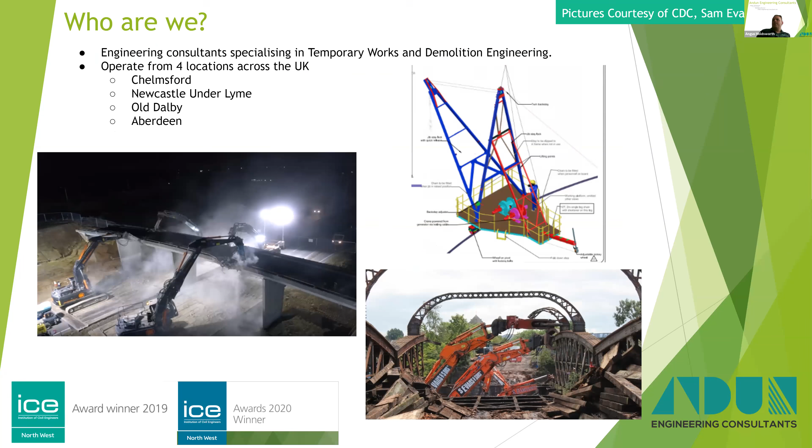Today's presentation is on cut and carve demolition. Some of you may be fully aware what cut and carve is, but for those who aren't, in general terms what it means is you're taking a structure and modifying it. So you're not completely demolishing it, you're generally looking to keep it.

This is a good example of a job in West London, Gramophone Works, where the red shows holes that have been cut in the slab. There's lots of risers and bits and pieces, and all the facade has been taken down.

Interestingly, they wanted us to break back. This is the cut line here. So the cut line was here, but we then had to break back all of this to expose the rebar so they could tie the new slabs in. Sometimes they do it like that, sometimes they don't, but in this case that's what they wanted. That's a good example of cut and carve.

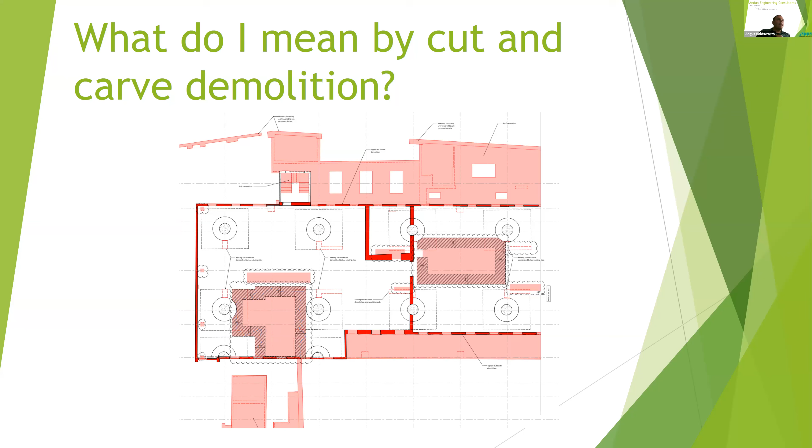Another good example was the works we did at Centrepoint House, or Centrepoint Tower in London. Again, you can see on the left-hand side everything in red had to be demolished and taken out, and on the right-hand side is what went back in. That's a good example of a cut and carve scheme.

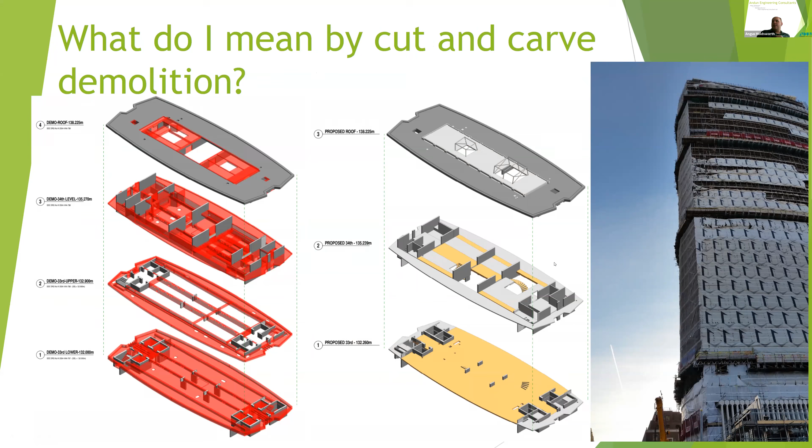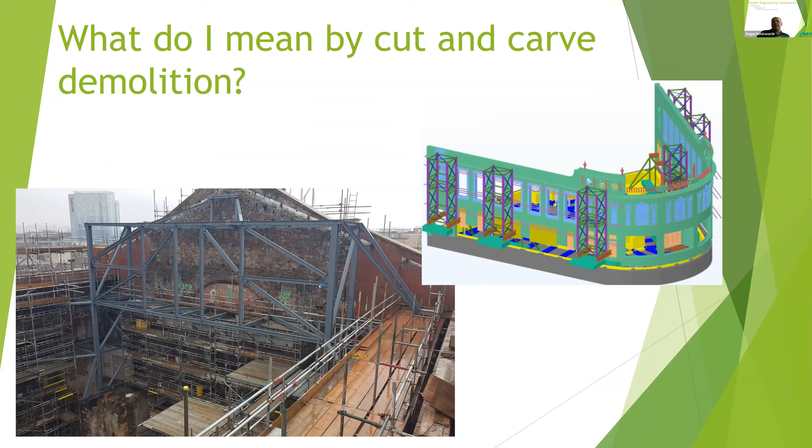Facade retention can be classed as cut and carve, I suppose, because you are looking to keep a good proportion of structure. It's not typically what I would mean by cut and carve, but it's kind of along the same lines - you're looking to keep a large part of the existing structure.

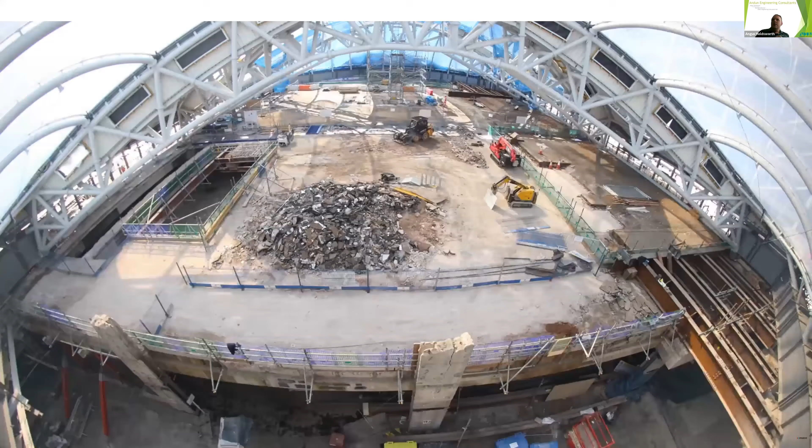This is a very good example - Birmingham New Street. This is the very top of the structure, the top level. Quite an old one, but also quite a good video of cut and carve in action. You can see they put the atrium over the top, and then we're taking out what is now the nice big light concourse level at New Street Station.

If you remember how the station used to be, it's quite a different beast now. But this is a good example of cut and carve where we're taking out significant parts of the structure whilst keeping the rest of the structure and keeping the building operational at the same time.

In this case, though, we were actually able to run some quite large plant because that building was built like the proverbial brick house. I think it was actually about a 20-ton machine. It was their custom-made - what was it called - the Mega Muncher. It was a combination of bits from JCB and a special dipper arm and a large attachment.

There you go. So that's a good example of a cut and carve scheme.

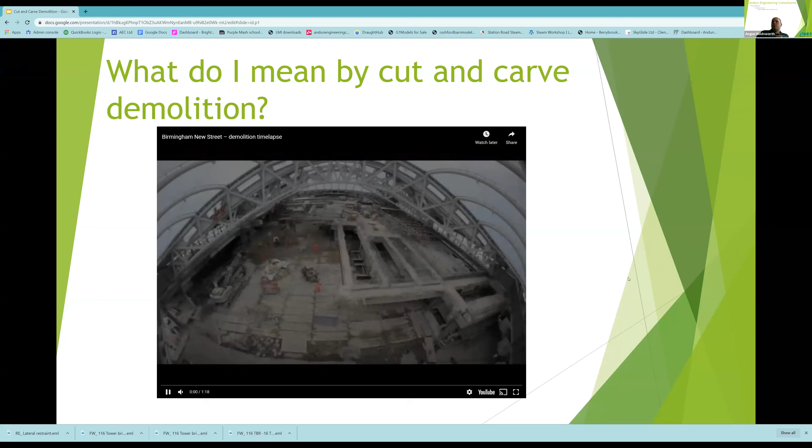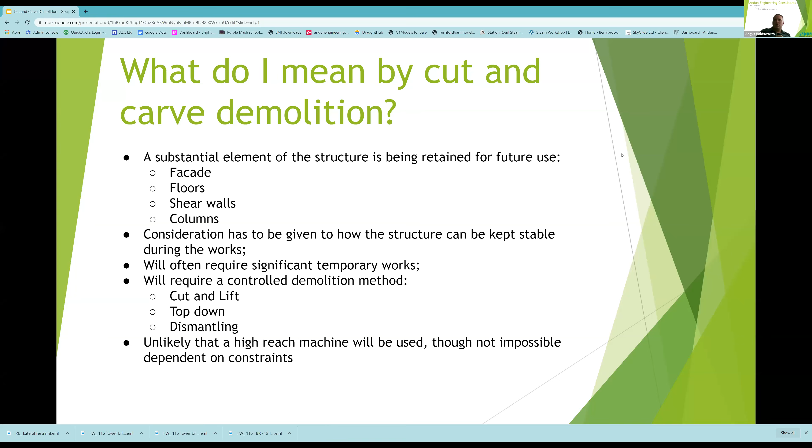I don't want to play that again. Why has that gone like that? Sorry, it's just gone a bit weird, give me 2 seconds, I'm just going to stop sharing and then reshare my screen because it looks a bit weird to me. Where's it gone? Why can you never find the button you want? There we go, right. Hang on, still not looking right. There we go, right, try again. There we go, that's back to how I wanted it.

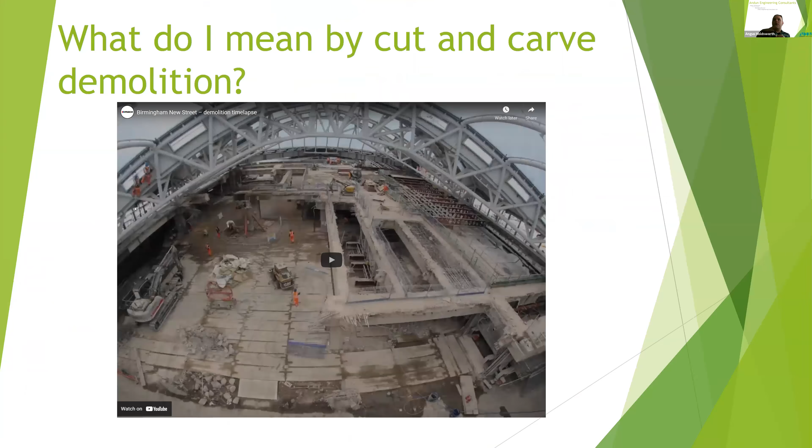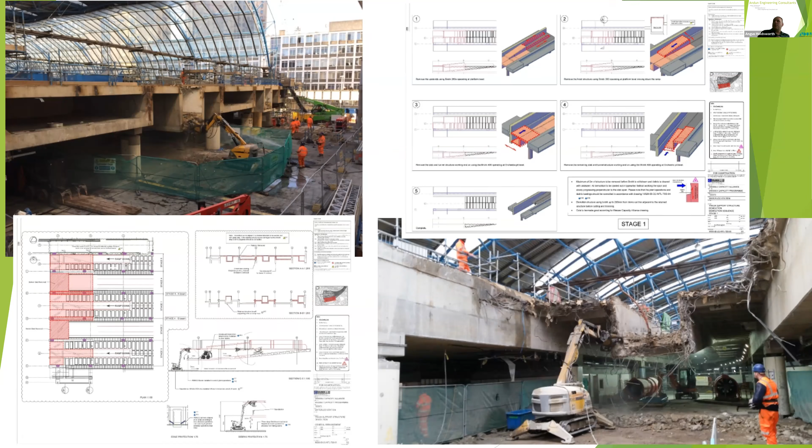So just as a recap, a substantial element of the structure is being retained for future use - that's when it becomes cut and carve. You have to consider how you're going to keep the structure stable.

Just want to check something, sorry. Yeah, fine, sorry, I just wanted to make sure you could see it properly. That was all - how we're going to keep things stable.

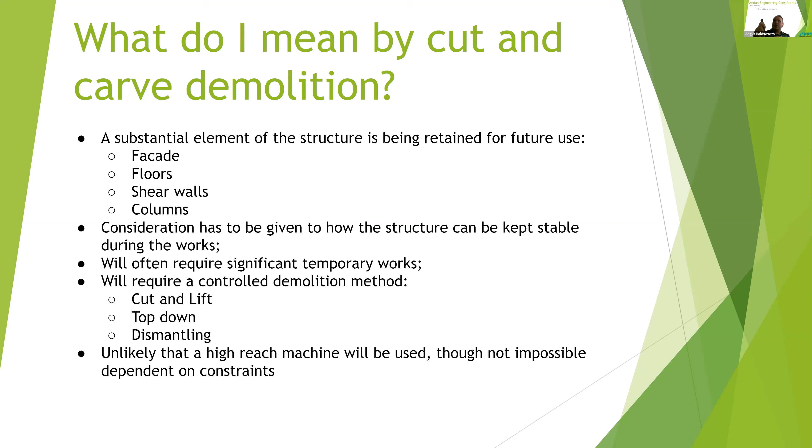We'll often require significant temporary works, and it's normally going to require a controlled demolition method. So you're going to be looking at cut and lift, top-down demolition or dismantling of the structure. Unlikely you'll get to use a high-reach machine or a large excavator, but it's possible - it depends completely on the structure and how much of it you're taking out. Generally, though, we're looking for a controlled demolition methodology. Now, the reason we end up doing it so often is planning constraints.

So it's a lot easier to get a scheme through if you're not demolishing the whole structure and you're planning on keeping what's already there. It's looked on a bit more favourably by developers, by the planning committees. If the structure has been assessed and they think there's some redundancy in it, this is getting quite common now in London.

Is they'll look to see if they can put another floor on top of the existing building. This will typically be in CLT, cross-laminated timber, or a lightweight steel structure, and you can put 1, 2, maybe 3 extra floors on top of a structure, and then you might be messing around with the core, changing the lift shaft arrangement, changing stairs, that sort of thing.

If you're changing the use of the structure, so potentially going forward, if people don't go back to the office, then you'll be potentially looking at changing office buildings into residential, and then there'll be a lot of messing around with cut and carve of buildings to change the use, I would expect.

If your facade or the structure is of historical importance, then you're probably not going to get away with demolishing it, therefore you're going to have to keep it.

And the other one that's becoming increasingly more important is environmental considerations. So people are certainly being considered far more detail than it was even going back a year or two ago. How your carbon footprint is, how it looks for the structure. Obviously, if you can keep a part of the structure and build upon that, it's going to cost you a lot less, not just in money, but in carbon, than if you demolish it all and start again from scratch.

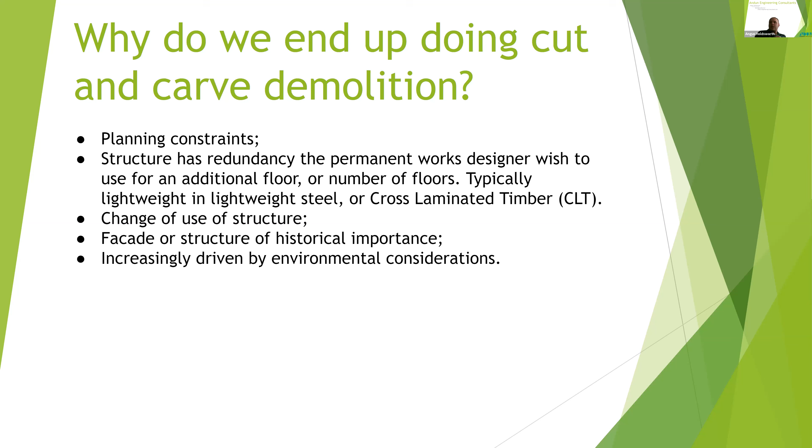So it's something I think that's going to increase as we go forward, the amount of cut and carve work as opposed to full demolition.

So there's a few things that I've identified that make cut and carve different to normal demolition works. And that is the need to consider serviceability. Normally when we're demolishing a structure, we're not concerned with serviceability a great deal. We want to make sure the structure is not going to fail when we're doing the demolition, and that's pretty much it.

A thing called load history needs to be considered, which I'll go through in a bit more detail shortly. Deflection becomes far more important, and deflection here, I'm thinking if you're propping large parts of the structure, the settlement or the movement of those props is quite an important issue, and knowing how to get around it and what to do about it. Stability is more likely to be an issue as well when you're doing cut and carve.

Quite often the core is what's removed from these structures because they want to put in a bigger lift or a faster lift, or they need to make the lift shaft taller. So you end up, one of the first things that goes is the core. So you've got to put in temporary stability to the structure. Whereas if you're doing the traditional demolition, you're more likely to be able to work towards a core or the stability systems in the existing structure and maintain stability in that way.

And then the other thing that becomes more important is how does the follow-on contractor complete the scheme? So traditional demo, you're going to leave the site either with basement backfilled or basement slab and first floor slabs or ground floor slabs still in. When it comes to cut and carve, you're going to do all the demolition. It's going to be handed over to the next contractor, or maybe you'll carry on with the works, but often another contractor comes in to then do the rebuild, and you've got there's that handover between how it's been left after the demolition and how the follow-on contractor is then going to work.

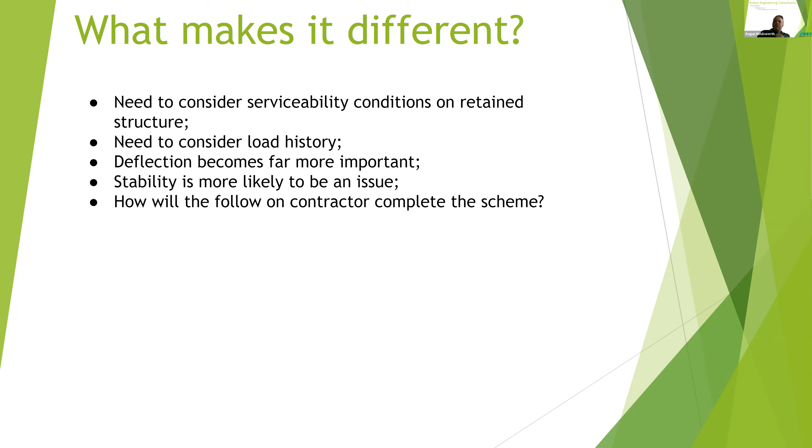So serviceability conditions. This is another job, or this is Gramophone Works again, where we were cutting some large holes in the structure throughout all the different floor plates. Not a very tall structure. I think it's 3 stories in the basement, and lots of holes being cut.

And we obviously had to consider serviceability conditions of the slabs during the demolition works for access by plant, men, materials, and propping to suit to make sure that the structure would remain stable throughout, and we're not going to cause any cracking.

And we're not talking here about visible cracking, we're talking about exceeding the serviceability capacity of the slabs, which leads to micro cracking, which long term can lead to rusting of the reinforcement, and can affect the lifespan of the structure.

So you have to think about making sure you're not exceeding serviceability, and considering how the change in removal of section of the slabs is going to affect the building. So for instance, here you can see the grey circles there are the columns.

If you cut these big chunks out of the structure, you're changing significantly how the slab works, and you've got to make sure you put the props in the right place to pick up those loads. It's not the same as back propping a structure for plant loadings - it's quite different because you're cutting and changing the load path within the structure.

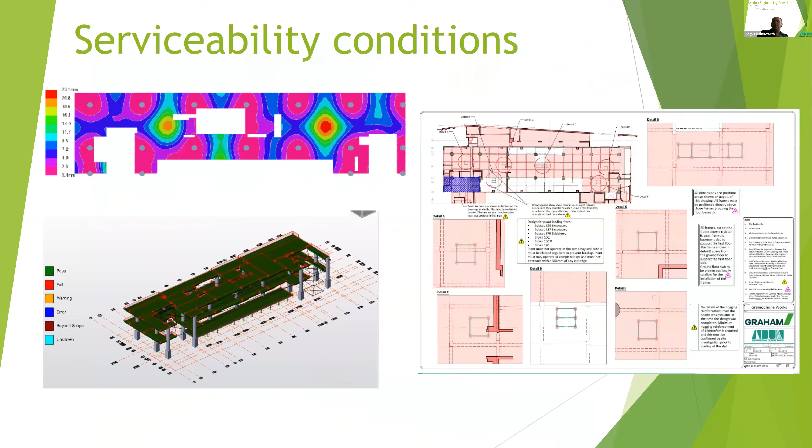And there it is in reality. I think they actually changed the cut lines from the drawings we had there, but you get the idea that we're taking sections out of the structure. You can see there they've broken back and left the rebar protruding out of the slab.

Obviously, with work like this, it's even more important that you know how the structure is going to behave and you have sufficient information regarding where the steel is, the grades of the steel - all of these things that we want anyway, but it becomes more important that you know how the structure is going to behave if you're trying to keep part of it. And it's equally important for the permanent works designer to know this, so they know that what they're doing is actually going to work.

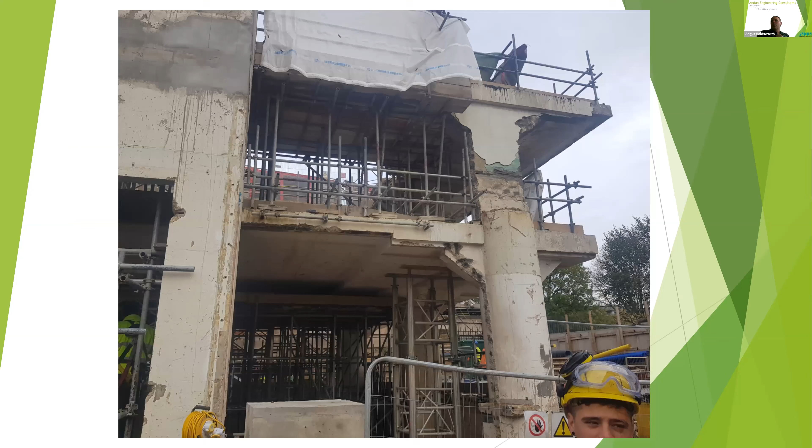Just an example, we can see quite a lot of the Titan propping in there.

Serviceability again becomes more important when you're looking at pre-stressed structures. So here, this is at New Street again, but it was quite a good example that sprung to mind. We had to run a lorry in over these beams, which were precast spanning grid line to grid line. Now, they had the ULS capacity to deal with the loadings, but they would have been pushed past their SLS capacities, which would have affected the longevity of the beams.

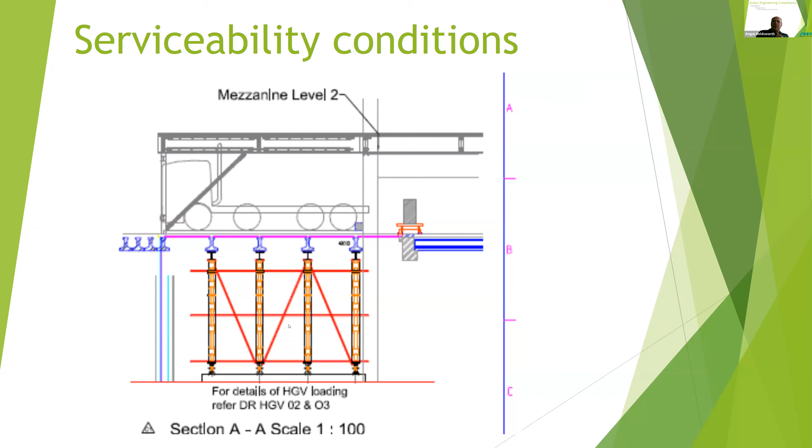Therefore, we had to prop it. Again, that's not something you would do if that was all being demolished and it had structural capacity for the load - you wouldn't worry about it. But because we're keeping it, it becomes something to be concerned about. And there's just a picture of it in use. You obviously can't see the propping or the slab underneath, but that is the same location as you can see there with the beams coming out.

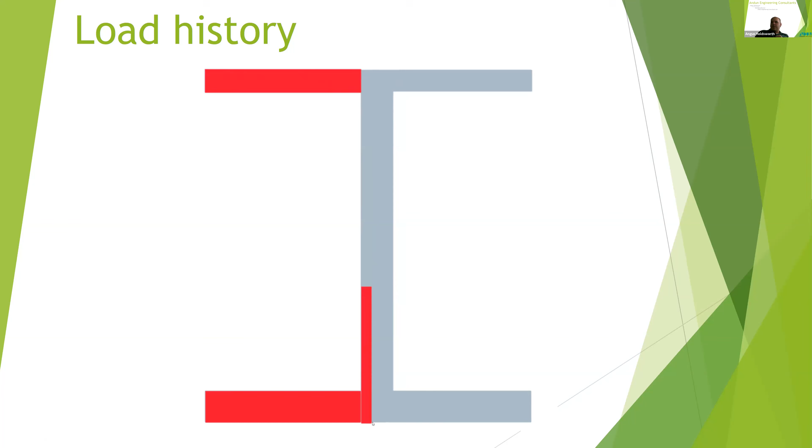Load history - this is a topic that we've come across many, many times with schemes that come in. People don't seem to grasp this concept. So if this is a section through a building, you've got a concrete column, floor slabs, and the demolition drawings say, right, you're taking that slab out and we want you to take out part of that column and that slab there, and then you're going to tie into that column.

What they seem to miss is that if you break that out, all the dead load in the structure is now going through here - it has to, it's the only load path that's left. When you come along and you tie in your bit of concrete here, this green section in the column is not going to be carrying any dead load at all. It can't, because the dead load is already being carried through the reduced column section here.

And that becomes very important when you start considering, is this tied in? When they start assessing it in the permanent case and say, oh well, we've got a full column back again, and then they spread the dead load and the live load through that full cross section - you can't. It's only this part here that will carry the dead load. This part here can only carry any live load that's applied up here. And we see it quite a lot.

The only thing you can do is jack the structure, then cast that, then release it. That way you can put the dead load back through the whole cross section. Similarly, with steel beams or steel columns, if you want to strengthen a steel column for dead and live load, you've got no choice but to jack the structure - you've got to jack it to take the dead load off the column. You can then strengthen it. Then when you release the jacking, that dead load will go through that full structure.

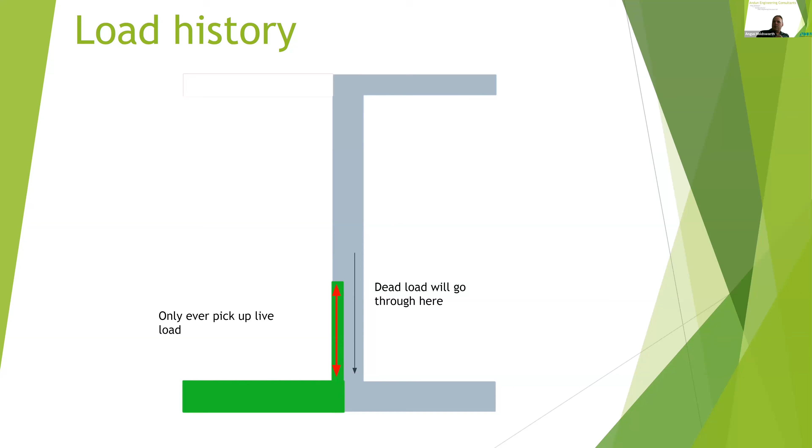If you just go up to a column that's already carrying the full weight of the structure, then you put your strengthening on the side of it, that strengthening will only ever pick up any live load that's applied to it. It can't possibly pick up the dead load that's in the structure. This idea that it can is nonsense, and we see it quite often with cut and carve and strengthening schemes.

Deflection - if you're keeping part of the structure, maybe 7, 8, 9 floors, and propping all of those back to ground level, the deflection at the top is going to be fairly significant, and it's something that needs to be considered. You've got to make sure your cut edges are adequately supported and that you're not overloading beams and columns because of the change in the load path through the structure. All of these things can lead to overloading, but also excess deflection that becomes a problem when you rebuild the structure and find that edges of your slabs have dropped 30, 40 mil from where they need to be. It's something you need to think ahead about and have a plan for how you resolve it.

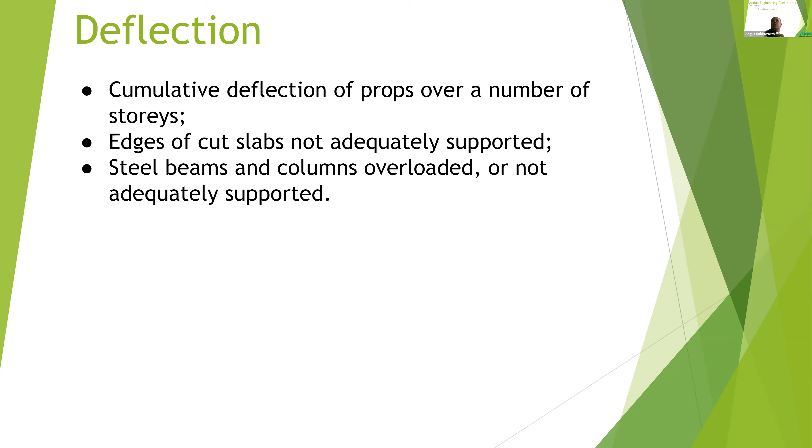It gets difficult because you've got the cross line between the demolition contractor finishing and the next contractor starting. Or if you're the demolition contractor doing the build as well, you've got to start thinking about it earlier rather than getting to the end of the project and asking how you put the new floors in now when everything's dropped.

So this is an example of a scheme in London, I think it was 6 stories. The cumulative deflection in the propping wasn't insignificant by the time you got to the base, so the top floors would drop further. We looked at this scheme to see how the deflection would change if you didn't jack. If you did no jacking whatsoever, you'd end up with an overall change of 45 millimeters, which would be outside the scope for the works specification. With the jacking in place, you can bring that down to 17 millimeters, which was within the allowance for the specification. Again, it's a big area to look at and make sure you've got a proposal in place for how you're going to get around these issues.

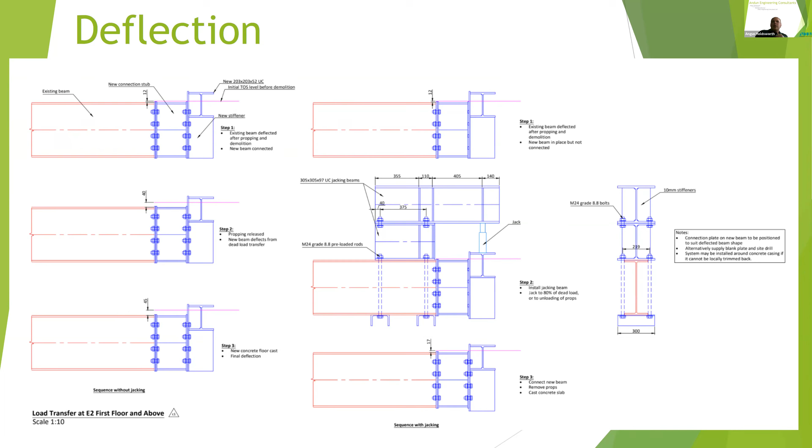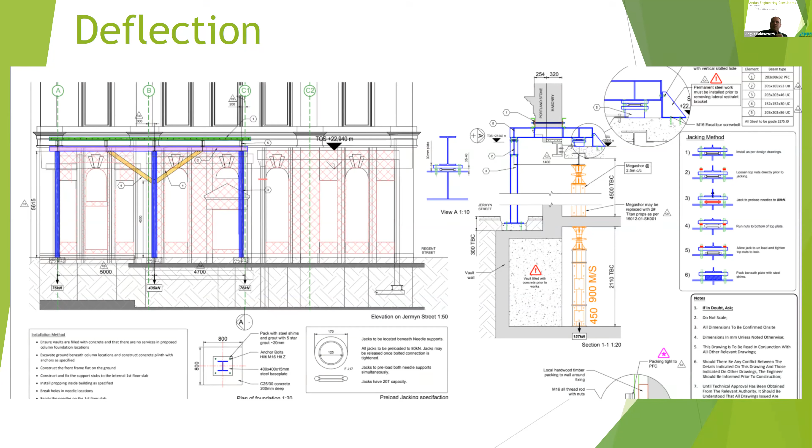This is another example of using jacks to control deflections. Not really a cut and carve scheme, but we had to take out a big shop front and put in a new steel support, and the only way to do it was to put in a system with jacking in place. You couldn't physically fit a deep enough beam or enough columns to pick up the load adequately. So the only solution was to use smaller steels that had enough capacity but not enough stiffness to limit deflection, and then use jacks to control the deflection of the facade, and that worked quite well. It did the job nicely.

So stability in all shapes and forms can come into play when you start doing cut and carve.

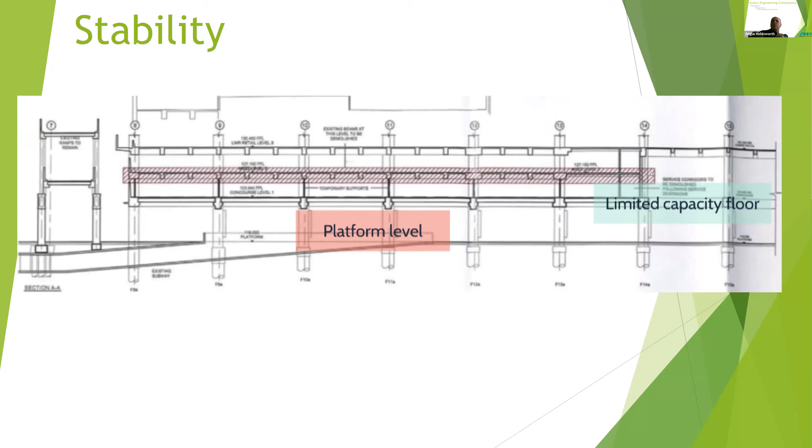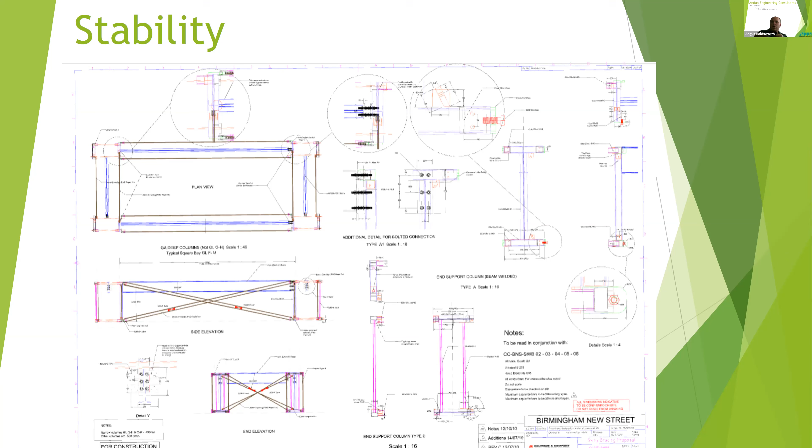Again, this is New Street, but it's a good example of where you have to start thinking. At New Street, we had a whole floor, the old car park level, throughout the structure that had to be removed. By doing so, you're changing the column length from 1 story to 2 story, which required temporary bracing to control it. When we did the analysis of the structure, it required some temporary bracing to go in. Excuse the quality of the drawing - I'm not sure why it looks so rough, but it's quite an old drawing. Something had to be considered.

Similarly, this is Centrepoint in London with John F. Hunt. Here we were taking out the red, which is the floors and beams that tie the columns together. You've gone from an effective length of 1 story to a 3-story effective length for these columns. Again, you've got to think about that and have a plan in place to either prove that the column will work like that, which in this case it wouldn't, or put in temporary bracing, which is what we did.

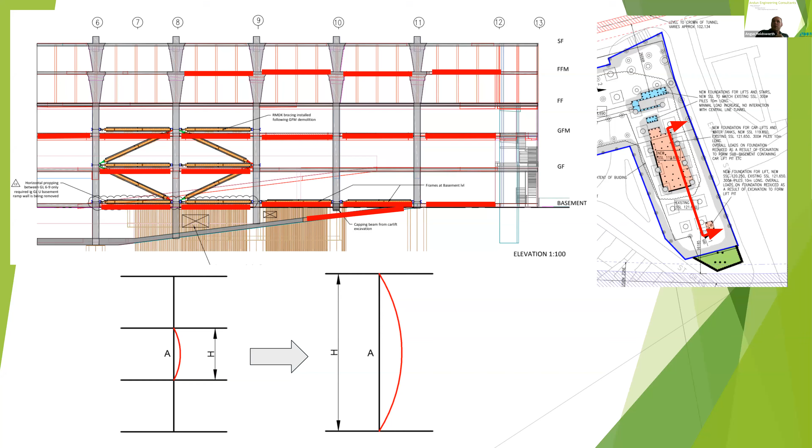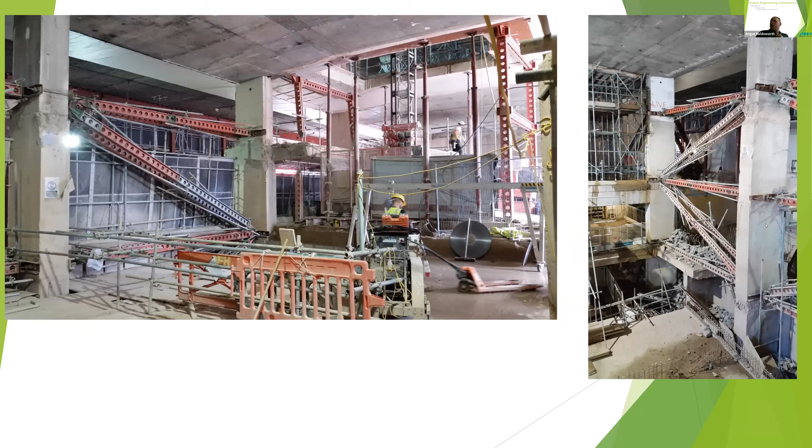You can see there's quite a lot of significant temporary bracing there. They are super slims - two sets of super slim bracing on the columns there, full height, to brace those columns in their weak axis. Clearly they had capacity in the strong axis, but in the weak axis they needed bracing because you're at the bottom of a 30-something, 32, 33 story tower. That's just another picture of it. It was quite spectacular, that job for the temporary works, and the cut and carve that went on that scheme was quite significant.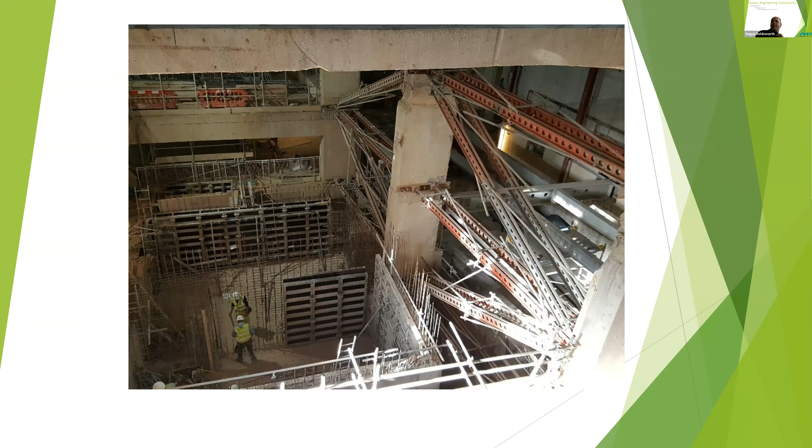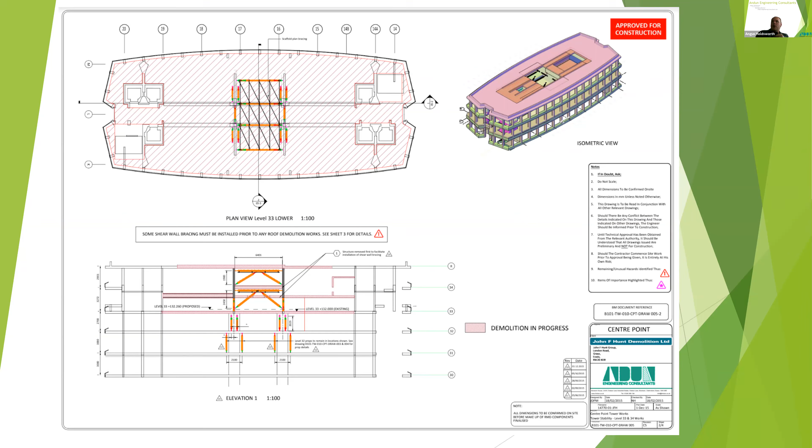So this is a bit higher up the tower, where we were taking out floors. It was that drawing I showed right at the beginning, where we were taking out the floors at the top levels - level 33, 34, 35, roof 34 and 33. Again, significant temporary works were required to keep the structure stable as the demolition works progressed. All sorts of propping and stability systems were installed in that structure to keep it stable. There is, again, significant temporary work, significant cut and carve on a very challenging site, that one.

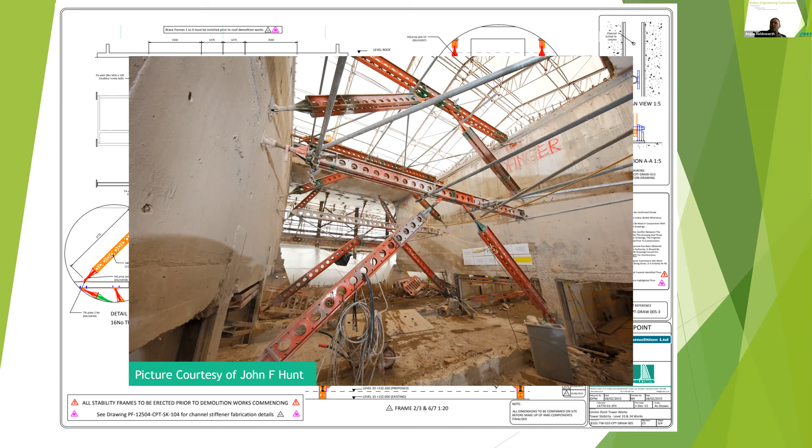This again, looking at stability. So this is City side, a John F. Hunt job again. Here, there used to be, I can't remember if it's lift shafts or if it was masonry. I think it was masonry cores and light wells, which gave a degree of stability to the structure.

On this one, the Permanent Works designer had said where they wanted the temporary sway bracing putting in, which is, you can see there, those blue and red dotted lines. So that's where they were put in, and then we did the detailed design of them from there. Fairly simple bracing that works in compression or tension all the way through the building in the position shown.

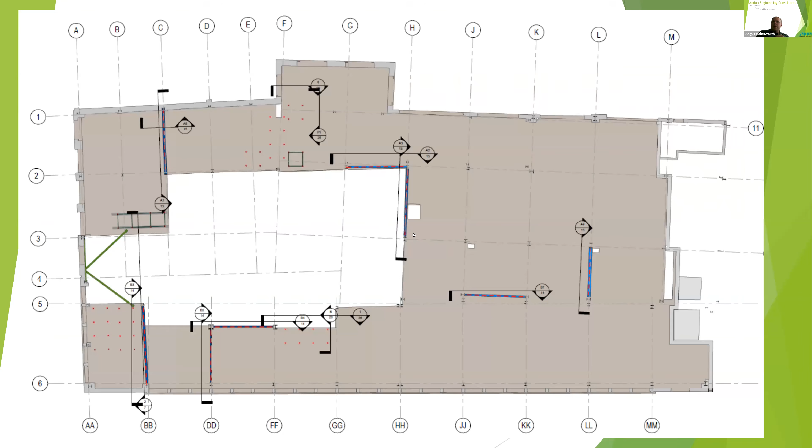And this one also, as we were taking out columns and slabs and all sorts, there was a lot of vertical propping that went in as well. You can see propping there, propping underneath here, propping here, propping over here. There was also facade retention of the top 2 floors. You can just see the facade retention there peeking on the top of level 3. So you had 2 stories of facade retention at the top of the building, and then all sorts of bits and pieces going on with beams, columns, walls and slabs being removed all over the place, and a lot of propping went in.

Again, because we were mindful of the loadings and the deflection in the long term, we've used a higher capacity system all the way through to try and limit deflections of the slabs.

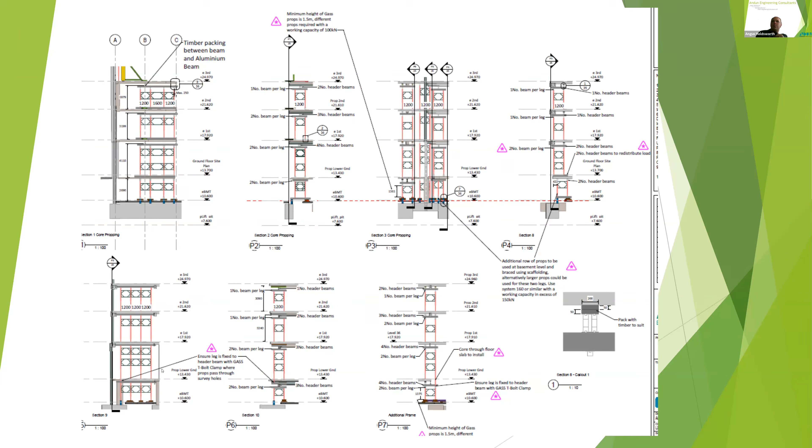It also brings about interfaces. So as I said, we have facade retention, sway bracing, vertical propping, and in this corner in particular, you had 2 lines of facade retention sitting on top of vertical propping through the height of the building, and then your sway bracing there as well. So it really pays to think these things through and make sure you've got everything covered before you go charging off. And then we had this facade here, had the slab taken out, and that was restrained all the way up the building as well with a simple knee brace type system.

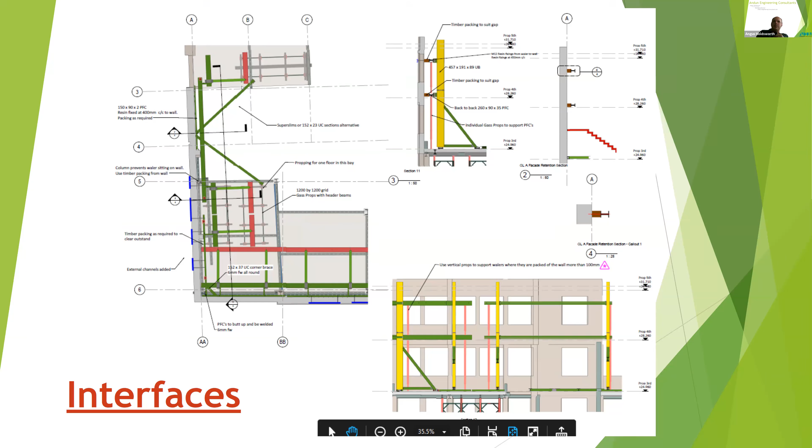As I said, the follow-on works is often a change in the contractor, though not always. It's a potentially dangerous handover point. You've got to make sure that they know everything you know about the structure. The other thing that often crops up is there might not be a specification for the demolition works that limits deflections and movements of the structure. Whereas the contractor who's building or carrying on building the next phase will probably have limits on slab tolerances, slab levels, those sorts of things. So it can be a bit of a tricky point if that hasn't been considered during the demolition stage.

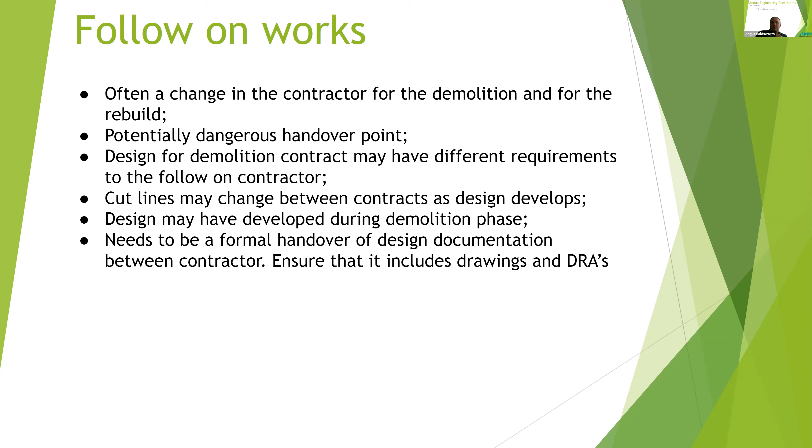You also find cut lines change as the design develops. So you might have put in a nice set of props and worked it all out, and the cut line changes as the design develops, which can cause problems with the design developing generally. There should definitely be a formal handover of design documentation between contractors, specifically drawings and the DRAs, so they know what's been done. And if there's any as-built of the temporary works installed, if they've changed from the design intent, that should be recorded and handed over.

Interestingly, on the one at Cityside House, we actually worked with John F. Hunt, the demolition contractor, and then when it went to the construction phase, we carried on working on the scheme for Elmers, who were doing the construction phase. We did a whole set of reviews, analysis and drawings to indicate how to work with what was already there and make it work with the permanent condition, which was kind of a point that was missed out of both contracts. So it went through and explained how Elmers wanted to build the building and how it was already sitting, how and what they would need to do to keep it stable, and also to make sure deflections sat inside the specification for the works.

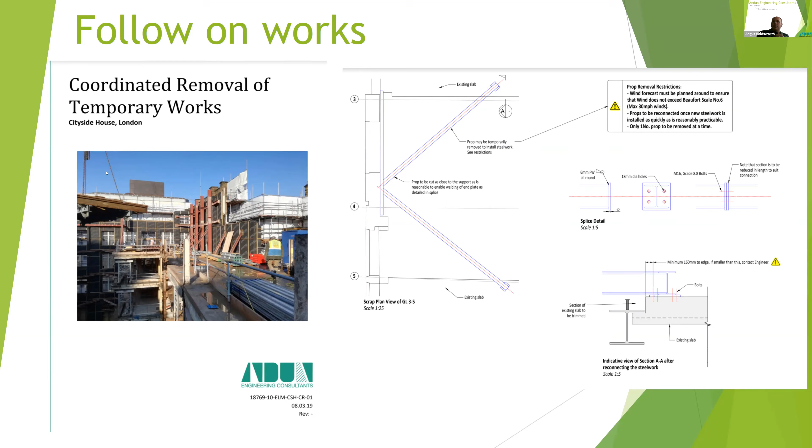That's just an example of one of the schemes there on that knee brace, the front facade that was in. And that brings me to the end, short and sweet.